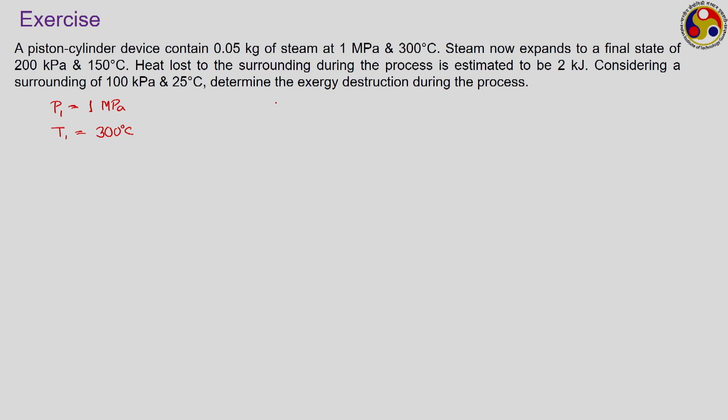And the steam now expands to a final state of 200 kilopascal and 150 degree Celsius. So, state 2 involves a pressure P2 of 200 kilopascal. Be very careful about this unit: in the first case it is megapascal, in the second case it is kilopascal, and the second temperature is 150 degree Celsius. Heat lost to the surroundings during the process is estimated to be 2 kilojoule. So, as the steam expands from state 1 to state 2, 2 kilojoule of heat is transferred from the system to the surroundings. Considering surroundings at 100 kilopascal and 25 degree Celsius, determine the exergy destruction during the process.

So, during the process we have this as your reference state, 100 kilopascal and 25 degree Celsius. But before going to the reference state, let us look at the two states. State 1 is 1 megapascal and 300 degree Celsius. Now, which regime this should belong to, compressed liquid or superheated vapor or maybe a mixture, that we can identify by using these two values. Now, how to do that?

If we just fix the pressure at 1 megapascal, we have to identify the corresponding temperature. So, here I have a glimpse of the superheated vapor table corresponding to 1 megapascal, and there you can see the corresponding saturation temperature is 179.88 degree Celsius. This T1 is greater than Tsat corresponding to P1, that means it is superheated. So, we are dealing with superheated vapor.

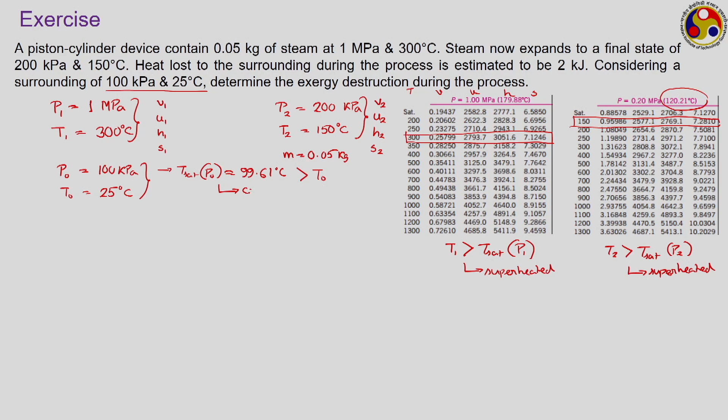Now, which state should this belong to, if you have water at this condition? 100 kilopascal is quite close to atmospheric pressure, 101.3 kilopascal, so the corresponding saturation temperature definitely will be higher than 25 degree Celsius. Actually, Tsat corresponding to P naught is roughly 99.61 degree Celsius, which is greater than T naught. Here the temperature is lower than the saturation temperature corresponding to the pressure, so we are talking about compressed liquid.

So, corresponding to the compressed liquid state, we can get all the relevant properties: U naught will be equal to Uf at T naught, V naught will be equal to Vf at T naught, and similarly we can get H naught and S naught. So, we now know the property values at state 1, state 2, and the reference condition of 100 kilopascal and 25 degree Celsius. Now, we have to determine the exergy destroyed during the process. How much will be the exergy corresponding to state 1?

We can easily calculate X1, the exergy at state 1. How much will that be? It will be mass into, if you can remember, that is fine, otherwise you can refer to our first week, the 4th lecture of module 1, or you can refer to the textbook. Here we are talking about a closed system.

So, for a closed system, the specific exergy will be u minus u naught plus P naught into v minus v naught minus T naught into s minus s naught, and then you multiply with the mass to give the value of the total exergy of the system at state 1.

You have all the property values here; for state 1 and state 2 I have already shown the table. The reference state you can get from any standard database, and if you do the calculation, your X1 is going to come to approximately 35 kilojoule. Similarly, how much will be X2? X2 will again be mass into the same. For state 1 actually you have to put the subscript u1, v1 and s1.

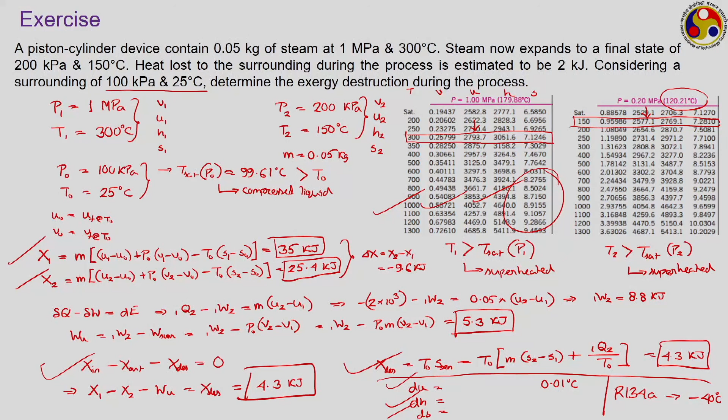You may encounter a situation where you may have 200 kilopascal and 400 kilopascal tables available, but no table for 300 or 350 kilopascal, but you actually need to calculate the properties corresponding to 350 kilopascal. Then you may have to either approximate something, take the average of two tables, or go for some kind of interpolation between the 200 and 400 kilopascal values, which again are error prone.

So, for the gaseous stage, at least the superheated vapor stage, it would have been much easier if we could find some suitable PVT relationship to work with. Of course, the tables are available with us, but even when the tables are available, we may go for devising some kind of equation of state to check whether these equations are capable of giving values comparable to the table. If they are able to give, then there is no replacement for the equation of state. We can just avoid using such bulky tables and directly use the small equations.

And the simplest possible equation of state that we can have for the gases is the ideal gas equation of state. Now, the ideal gas equation of state is very well known to you. You must have heard about the experiments performed by Robert Boyle centuries back, when he observed that at low pressure level, as we approach vacuum, the specific volume of any substance is inversely proportional to pressure. Similarly, the experiments of J. Charles and J. Gay-Lussac have shown that at low pressure levels, specific volume is directly proportional to the absolute temperature.

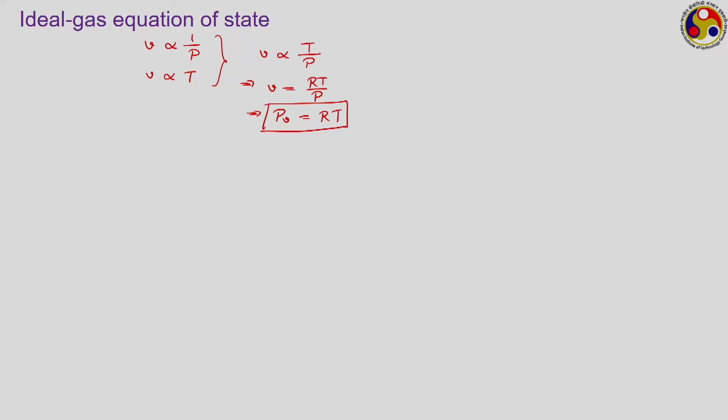However, substances like high pressure steam, carbon dioxide, refrigerants hardly follow this under normal atmospheric conditions, and that is why this may not be most accurate for those kinds of scenarios. Now, there are several alternative forms of this equation available, but here it is important to note that this R is the gas constant, which is a characteristic of every gaseous substance. Every substance has its own value of R, whereas R bar, occasionally also written as Ru, is the universal gas constant, which is a universal constant.

Now, what is the value of the universal gas constant? This is equal to 8.314 kilojoule per kilomole Kelvin, whereas the SI unit for R is kilojoule per kg Kelvin. Be very careful about these units. For the universal gas constant, it is kilomole in the denominator, whereas we have kg in the denominator for the gas constant. Now, what is the relation between the two? R is defined as R bar by M, M being the molecular weight.

What is the unit of molecular weight? Molecular weight refers to the mass of the substance which contains a number of molecules equal to Avogadro's number. Now, what is the unit of this? Here we are talking about a mass, that is kg per kilomole. So, kg per kilomole is the unit for M, from where we derive this unit for R.

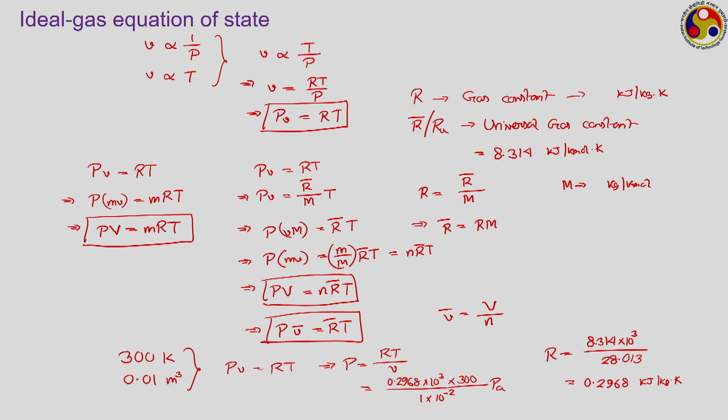This way we can easily use the ideal gas equation of state, but the problem is that, as I have mentioned, this is found to be more or less accurate only when we are dealing with very low density gases. As the gas density keeps on increasing, means we are moving to higher pressures or lower temperatures, it starts to deviate. Means as long as density is low, that means pressure is low or temperature is high, ideal gas equation of state has been found to be quite accurate. But in other condition, that is not the case. That is even better understood by following this table.

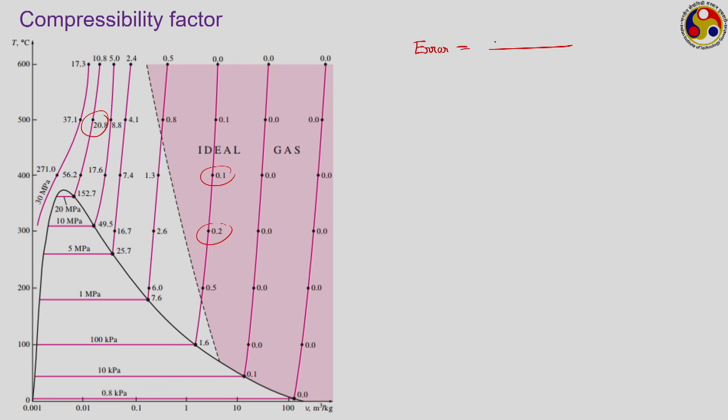and whatever values shown correspond to different nodal points like 20.8 here, this 0.1 here, these actually are the error if we use the ideal gas relation. This error that has been calculated here is V actual minus V calculated following the ideal gas equation divided by V actual, mod of that, into 100%. This is the error, these numbers are shown like this 17.3 here, 6.0 and 7.6 here, etc. Now, look at this table carefully, all these error values.

Here error values are all shown for a given pressure starting from the saturated vapor state to very high temperature levels. Like for 100 kilopascal, if we follow the 100 kilopascal line, this is a saturated vapor state where you can see there is a 1.6% error. As you are moving up, at around 200 degrees Celsius, we are having an error of 0.5%, and at 500 degrees Celsius, the error is 0.1%. So, as you are moving to higher temperature, the error is reducing. So, it is more logical to use the ideal gas equation of state.

Similarly, if we follow any other line, say for 1 megapascal, error is 7.6% at the saturated vapor state and 6% with small increase in temperature, but once we go to 500 degrees Celsius, it is only 0.8%. So, at 500 degrees Celsius, if we are using the ideal gas equation of state to estimate the specific volume of water vapor, that will introduce less than 1% error. That means, for the pink zone shown here on this side of the dotted line, the error being quite low, this is the zone for which we can use the ideal gas equation of state even for water vapor for estimating its properties or specific volume.

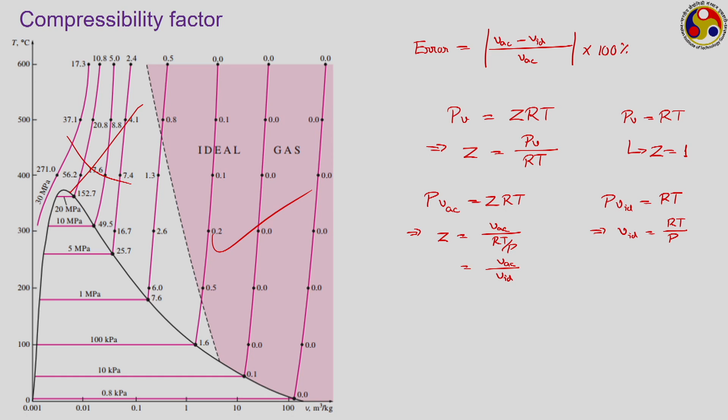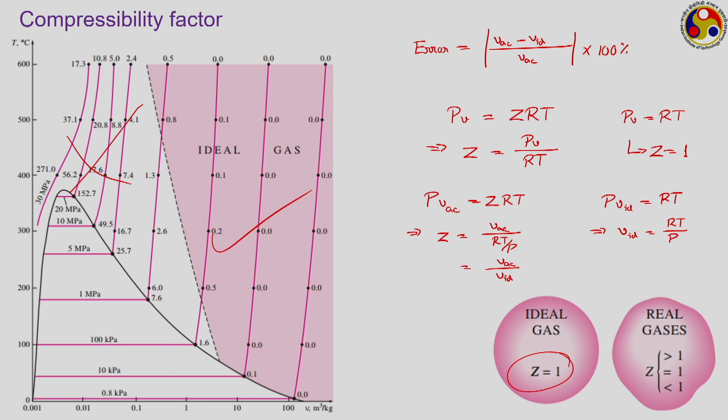Again, when Z is equal to 1, the actual specific volume is reasonably close to the ideal specific volume, or specific volume calculated following the ideal gas equation of state, but when Z is veering away from 1, this actual specific volume also keeps on changing rapidly from that ideal value. So, we can easily say that for ideal gas Z is equal to 1; for real gases which do not truly follow the ideal gas equation of state, your Z can be both greater than 1 or less than 1, and in some very restricted cases can be quite close to 1, where we can blindly go for the ideal gas equation of state. But when should we use this ideal gas equation of state and when not, that we have to identify, and for that we are using something known as the generalized compressibility chart.

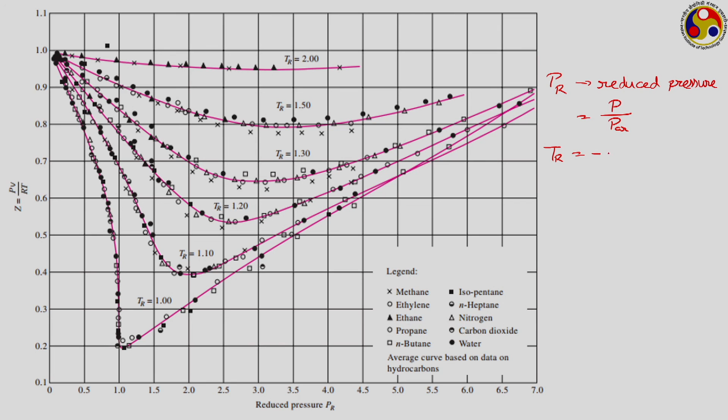The chart shown here is called the generalized compressibility chart, because this chart has been prepared not only for water, but for all these substances that are listed here. Before going to the description of the chart, I would like to define two parameters. One is PR, P subscript R, this is called the reduced pressure, and it is defined as the prevailing pressure divided by the critical pressure of that substance. Similarly, we can define a reduced temperature TR as T upon T critical. So, both pressure and temperature at a given state point have been divided by the corresponding critical values, basically to non-dimensionalize them, because PR and TR will be non-dimensional, and from there we are going to find some kind of generalized behavior.

Look at this chart, you have Z on the vertical axis, here PV, this V is actual V. So, PV actual by RT is Z, and you have reduced pressure on the horizontal axis, and each of these pink lines corresponds to one particular value of TR, like the one that has a circle corresponds to TR equal to 2, this is TR equal to 1.2, this for TR equal to 1. This way we can get different lines, and we can come below TR equal to 1 as well if required.

Now, look at the values. If your gaseous substance is following the ideal gas equation of state, then what should be the value of Z? Z should be equal to 1. So, this is your Z equal to 1. That means, if your substance with change in pressure is following this particular line, then it is quite close to the ideal gas behavior. But that is not happening.

Under certain conditions it is reasonably close to that, but under certain conditions it is far away from this, like these ranges, they are having extremely small Z values, far away from 1. Therefore, if we put a criterion that as long as Z is restricted up to 0.9 we can use the ideal gas equation of state, then you can see we are having that limit, Z greater than 0.9, only for extremely low values of the reduced pressure.

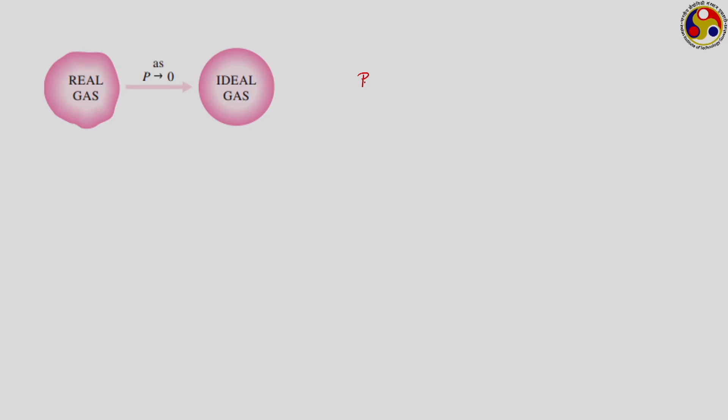So, this is the condition that I have summarized: as the pressure keeps on reducing, that is the number of gas molecules available in a given volume keeps on reducing, it approaches ideal gas behavior, which is the criterion where PR is much less than 1 for any temperature. The second criterion is where the temperature is very high, TR generally greater than or equal to 2, we can use this.

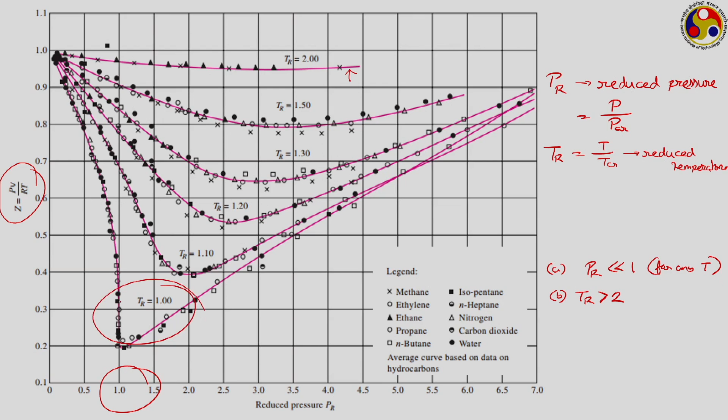But if you quickly go back to the previous slide, you can see the largest deviations are happening around the line where PR is equal to 1, and on the temperature lines, the one showing the largest deviation is TR equal to 1. So, the deviation is largest close to the critical point. When you are far away from the critical point and satisfying this criterion, you can use the ideal gas equation of state, but when you are reasonably close to the critical point, you should not use it.

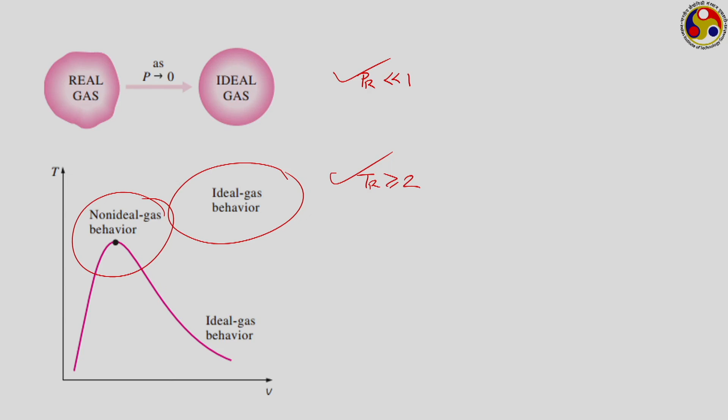Then what to use? One option is to make use of the generalized compressibility chart, from which we can calculate the Z values and compare with the measured values. Here in the exercise I am talking about R134a. The specific volume of R134a has to be determined for 1 megapascal and 50 degree Celsius using the ideal gas equation of state and also using the generalized compressibility chart. The real value is given, and we have to check how much error both approaches are giving.

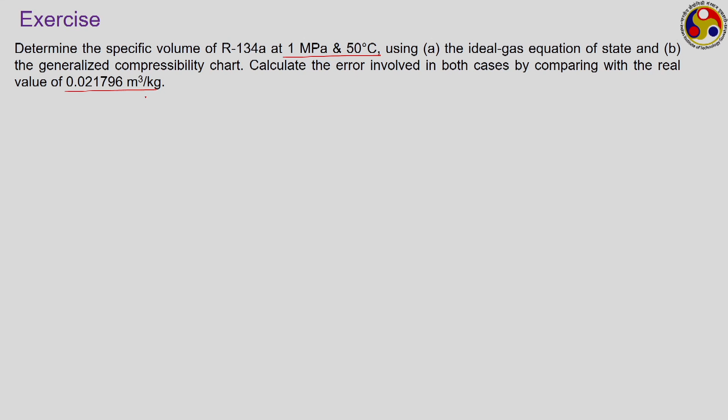Okay. Here critical temperature is given in Kelvin, critical pressure is given in megapascal. So, it is 4.059 megapascal. So, we have to calculate following either of the approaches. If we follow approach number 1, specific volume following ideal gas equation of state will be equal to RT by P. Here your P is equal to 1 into 10 to the power 6 Pascal, T is equal to 50 degree Celsius, we should convert that to SI unit, which will be coming as 323.15 Kelvin, and R from the table

0.08149 kilojoule per kg Kelvin. So, if you put the numbers here, I have pre-calculated the value for you. Here your ideal value will be coming as 0.026325, but actual one is 0.021796. So, corresponding error will be V actual minus V ideal by V actual, mod of this, into 100%, it will be somewhere in the range of 20.8%. So, a very large error that we are talking about.

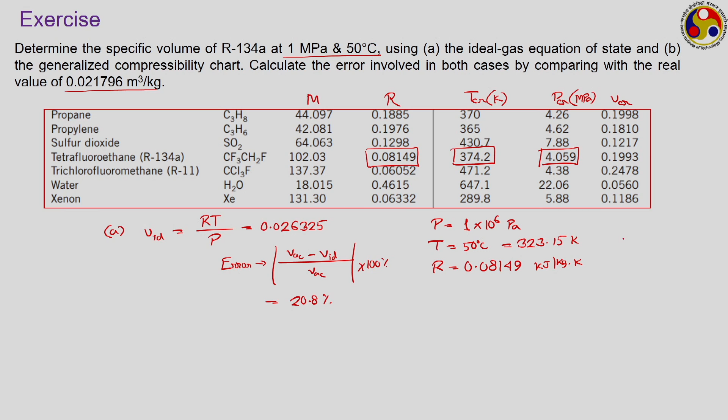And if we compare this in terms of our criterion, you can see in this case your TR is less than 1 and we need to have TR greater than 2. And what about PR? Here your PR is 1 by 4.059. So, roughly around 0.25, not that small as well. So, neither of the criteria are being satisfied. So, we should not use the ideal gas equation of state, and even if we use, you can see it is inducing such large amount of error.

Then what about the compressibility chart? So, we calculate PR as I have just done there, 1 by 4.059. Actually, I have the number calculated here, that is 0.246. TR is equal to 323.15 by 374.2, and this is coming to be something like 0.863. So, if you put them in the generalized compressibility chart that I have shown, your Z will be coming roughly 0.84.

Correspondingly, V actual will be equal to Z RT by P, and final value will be coming as 0.022113. You can compare this one with the real value given, which will be giving you approximately 2% error. So, a significant reduction in the error value by choosing the compressibility factor Z. So, this is one of the approaches by which we can calculate the actual specific volume using the generalized compressibility chart, but here again we are using a chart.

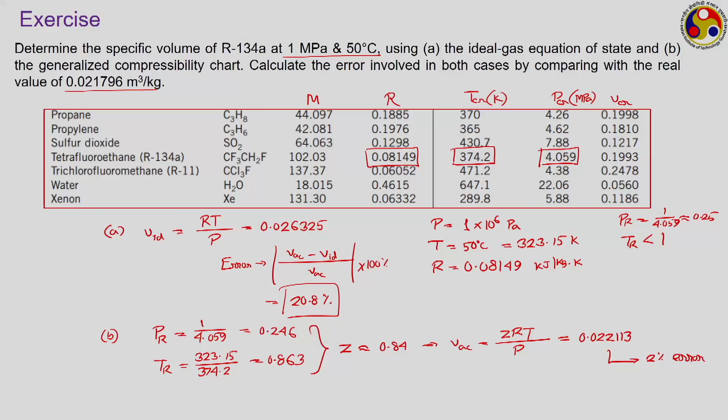Then the second approach that is possible is to develop a real gas equation of state which takes care of all the shortcomings of the ideal gas equation of state, and thereby making it directly integratable to apply the generalized thermodynamic property relations. So, there are several real gas equations of state defined. You can say theoretically infinite number of such equations exist. We shall be talking only about 3 of them here very quickly. The first one of them that you already know, the van der Waals equation of state. Truly speaking, I should have written this V to be small v, because that is the way they write. The van der Waals equation of state, you know the form, this is a standard format.

It takes care of 2 important shortcomings of the ideal gas equation of state. One is ideal gas equation of state completely neglects the intermolecular forces. This a upon v square, a being a constant, is a term which is used to account for the intermolecular forces somehow. And secondly, the ideal gas equation of state neglects the volume of the gas molecules itself. That has been compensated here by this term small b.

Now, just think about the conditions for which ideal gas equation of state can be applicable. Very low pressure means the number of molecules will be extremely small compared to the volume that we are dealing with, and therefore, we can virtually neglect the volume of the molecules and also the intermolecular attraction. The same thing is applicable when you go to very high temperatures. However, when you are not operating at these conditions, that is PR extremely small and TR greater than 2, then they should be considered, which is done in this van der Waals equation of state.

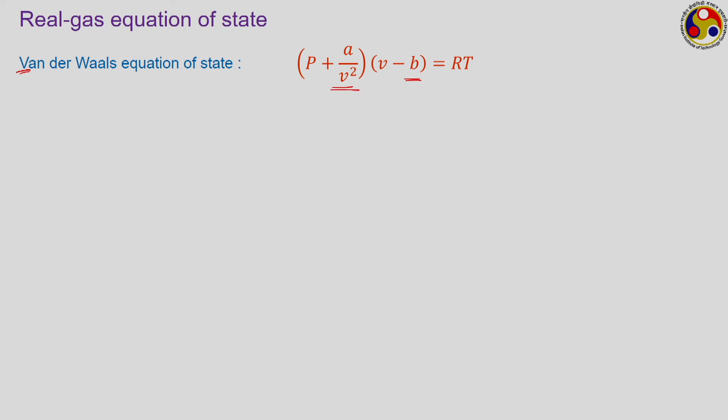Now, how to get the value of this a and b? There is a mathematical way of doing this. This graph I have shown earlier also. You know that on the PV plane, the isotherm corresponding to critical temperature shows a point of inflection at the critical point, such that we can write dP/dv at T equal to T critical is equal to 0, and even its second derivative at T equal to T critical is also equal to 0.

These 2 equations can be used to develop the values of this A and B for a given state point. Like from here we can write P is equal to RT upon V minus B minus A upon V square. If we use this, suppose if we differentiate this once corresponding to T equal to T critical, then what we are going to get? We have V minus B in the denominator. So, it will be minus RT critical by V minus B whole square plus twice A by V cube is equal to 0.

Similarly, if we differentiate this once more, then it will be 2RT critical by V minus B whole cube minus 6A by V to the power 4 is equal to 0. So, if we combine these equations and eliminate specific volume from here, then actually you are going to get these two expressions for A and B, where we are using ideal gas equation or ideal gas values.

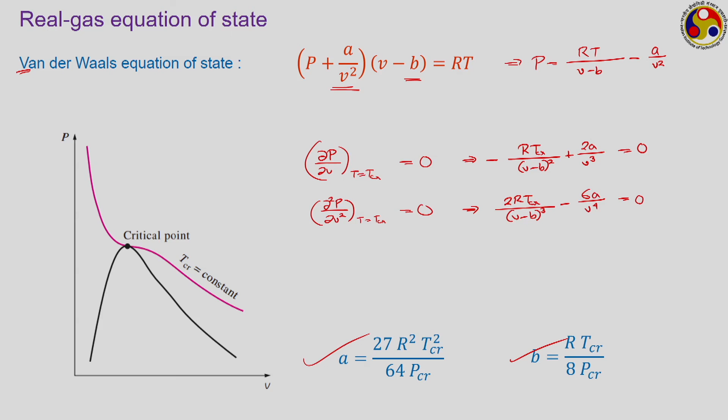Here one important thing that I am leaving to you is to do the mathematical relation. Please try to develop these relations for A and B. One hint is that you have to remove specific volume from here and somehow introduce the pressure corresponding to the critical point. So, you will be getting the expressions for A and B like this, where the critical point pressure and temperature values are involved and also the value of R. So, this way once we know the critical point values, you can easily calculate the value of A and B.

Now, Van der Waals equation of state is not very accurate either, definitely more accurate compared to the ideal gas equation of state, but it has its own inconsistencies, leading to the development of more advanced relations like this one. The Beattie-Bridgeman equation of state is one of the most popular ones. This is the format shown for this, where capital A and capital B lead to two further equations. Here note this V bar, this V bar is, sorry, the total volume divided by number of moles.

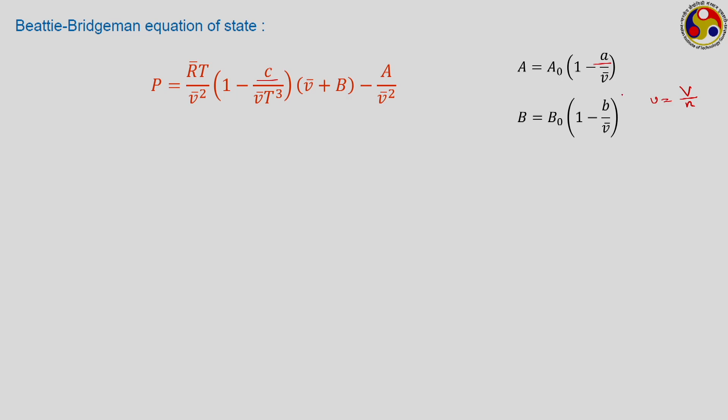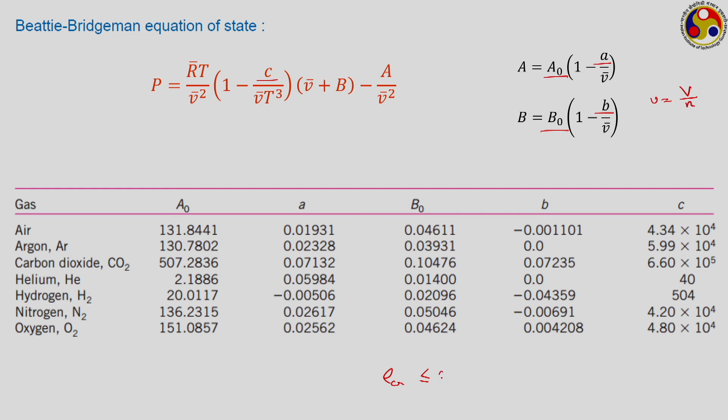So, how many constants can you identify in this? Like in the Van der Waals equation of state, you had two, A and B. How many can you see here? We have a c here, then we have a small a, small b, a naught and b naught, 5 constants involved here, and this is one of the examples of the constants for different gases shown here. This Beattie-Bridgeman equation of state is quite accurate, at least as long as the density rho critical is less than or equal to 0.8.

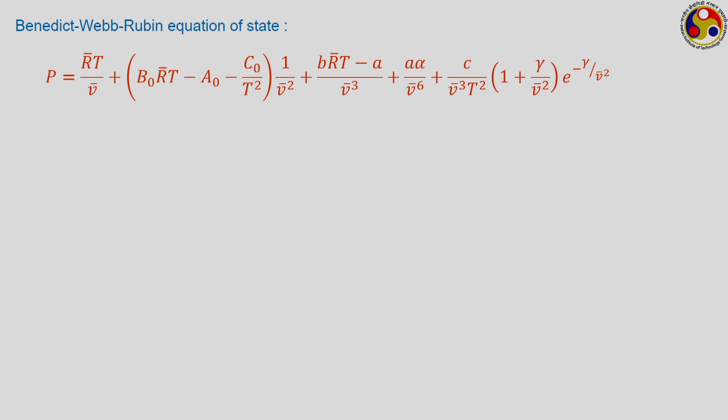An even more accurate equation of state can be this Benedict-Webb-Rubin equation of state, where the form is this, which involves 8 constants like this table is showing. It is found to be accurate for rho critical up to 2.5. So, it is a very large range of temperature and pressure we are talking about. And of course, it is much more complicated, and there are several others also. You can talk about the Strobridge equation of state, which involves 16 constants, and is therefore very difficult for manual calculation, but very suitable for computerization.

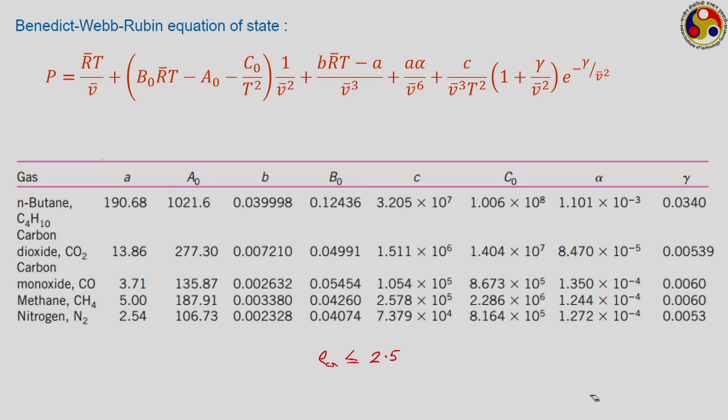We would like to close this module by checking one example of using these equations of state. So, here our condition is where we have to calculate the pressure of nitrogen at T equal to 175 Kelvin and the specific volume given, using the ideal gas equation of state, the Van der Waals equation of state, Beattie-Bridgeman equation of state and the Benedict-Webb-Rubin equation of state. And it has been found that the experimentally measured value is 10 megapascal. So, you have to compare for each of the cases.

Now, this is the situation for the nitrogen. You have this as the value of R for nitrogen, critical temperature 126.2, critical pressure 3.39 megapascal. So, let us calculate following the first approach.

For the ideal gas equation of state, PV is equal to RT, or P is equal to RT upon V. Here R is given as 0.2968 into 10 to the power 3, into temperature, here 175, divided by the actual specific volume, 0.00375, and your calculation will give you 13.851 megapascal, where the true value is supposed to be 10 megapascal, a humongous 38.51% error. And that is logical also.

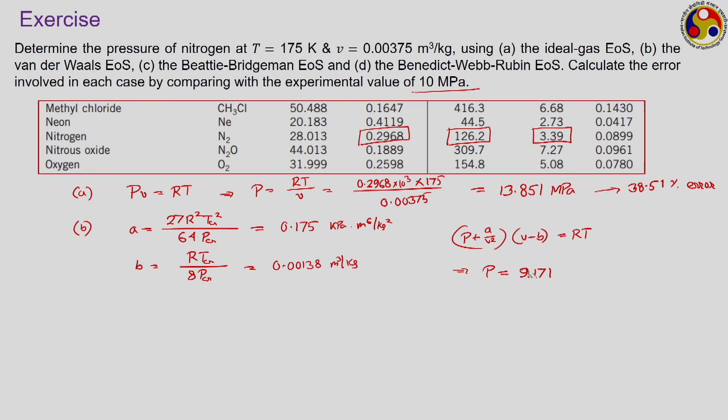So, if you calculate following this, your P will come roughly to be 9.471 megapascal. It is lower than the true value, but still a smaller error, approximately 5.3%. The constants required for the Beattie-Bridgeman and Benedict-Webb-Rubin equations of state are given in the previous slides for nitrogen. You can put the numbers there and try to calculate. I am just giving you the final result.

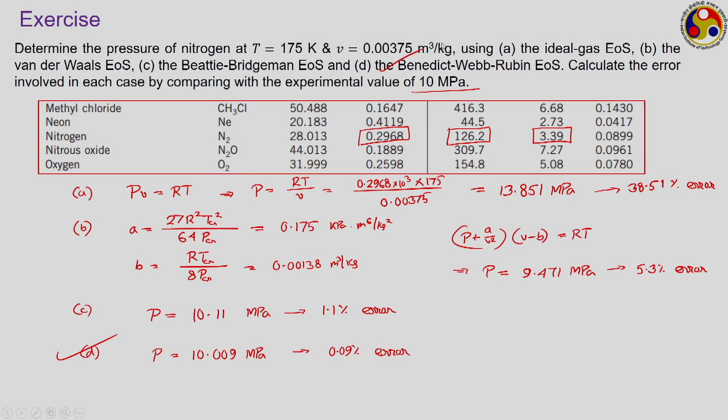For the Beattie-Bridgeman equation of state, your P will come to be merely 10.11 megapascal. So, how much is the error? It is extremely small, only 1.1%. Whereas if you use the fourth one, the Benedict-Webb-Rubin, your P will come to be 10.009 megapascal, something in the range of 0.09% error. So definitely the Benedict-Webb-Rubin equation of state is much more accurate compared to the others, but it is much more complicated as well, because it involves 8 constants.

You can find a few other equations of state in your textbooks as well. There are several specific equations developed for specific applications and specific substances, but the ones I have discussed here, the Van der Waals, the Beattie-Bridgeman and the Benedict-Webb-Rubin equations of state, are generally applicable for a wide variety of gases.

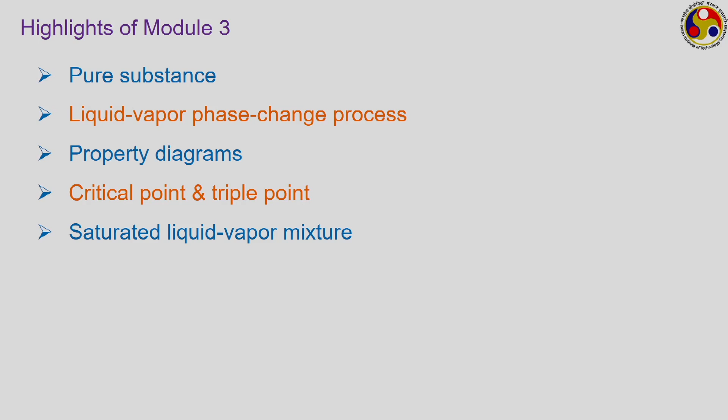That takes us to the end of module number 3, where we discussed pure substances and the liquid-vapor phase change processes involved with them, from which we developed the property diagrams, PV and TV diagrams. Then we included the solid phase to get the idea of the triple point and the critical point. Then we talked about calculating properties using the tables for saturated liquid-vapor mixtures, superheated vapor and compressed liquids, and solved several numerical problems.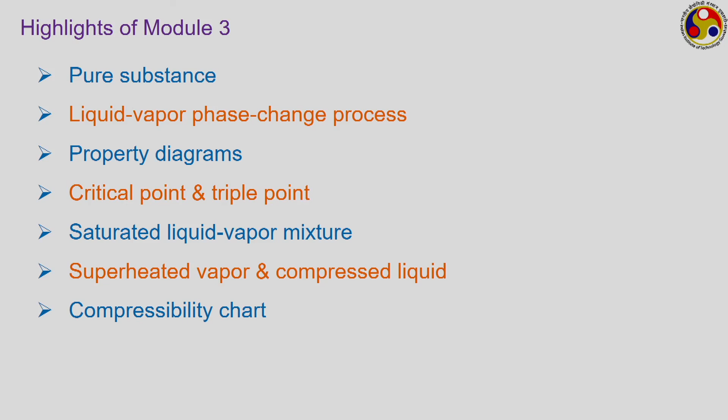Today we discussed the use of the generalized compressibility chart to calculate the specific volume of gaseous states when the ideal gas equation of state is not applicable. We also derived the conditions for which we should use the ideal gas equation of state and the conditions for which we should not. Finally, we discussed different real gas equations of state, and saw that the Benedict-Webb-Rubin equation of state is much more accurate compared to the others discussed here. So, that is it for the third module of our course.

You are now in a position to identify the properties of any substance, because in the second module we developed generalized relations for calculating properties, and in this third module we learned to use both equations of state and the general property tables to get the values of relevant thermodynamic properties. With this background, next week we shall go to the discussion of relevant thermodynamic cycles.